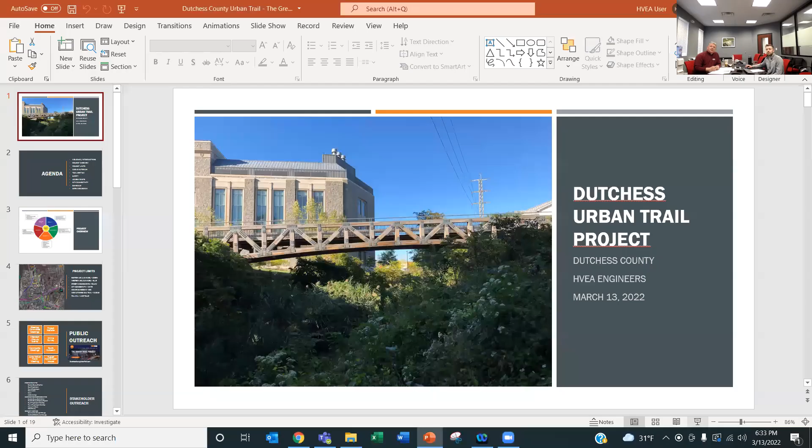I'm going to give you a very brief overview, and then Jack is going to give you more detail about the trail and its connections. But we're excited to present this project to you.

Happy Sunday, happy daylight savings time. My wife actually set all the clocks yesterday, so I made all of my time mistakes yesterday, not today, which is, I guess, beneficial.

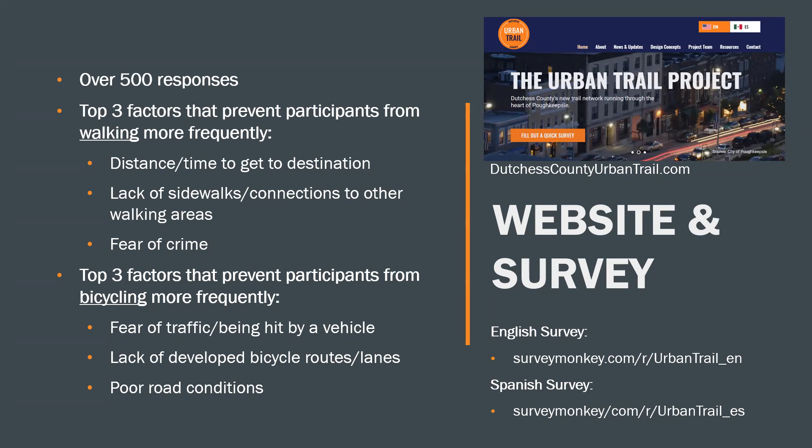Lastly, from our survey, I wanted to show that we had these initial concepts for the trail. I think one reason our firm was selected for this project is that we introduced the county to the concept of a split-use trail, with bicyclists and pedestrians on the same trail but separated — I think that's one thing that helped us get the project. After that, it was a very collaborative effort developing and refining our design to meet everyone's needs and fit within certain constraints.

We're at a real exciting time now. We're actually sending this out for bid, the first phase of this project, next week. It's a multi-phase project, and Jack will give you more information about that.

This is some of the stuff that came up in our survey about what people wanted for amenities on a trail. It's interesting to go through this list and see that everything on it, with the exception of probably trash cans — which has been problematic for the county and their trail system — is addressed.

So they look at it as a carry in and carry out. But other than that, all these other amenities are going to be a good part of this trail, so it really has great potential.

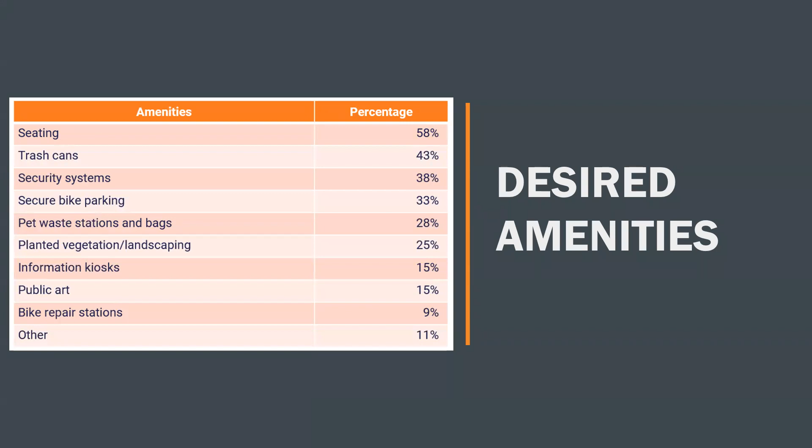All right, so with that, I'm going to hand it over to Jack, and he's going to go through the limits of the trail and some of these connections in a little bit more detail. Thanks, Brendan. As Brendan said, I just want to give you a general overview of the design and go into some of the specifics.

Given the unique character and location of this trail, we do anticipate heavy demand. In order to provide adequate space for all of the potential users, we're proposing several wide cross sections, all wider than the other trails in the area, with the exception of the walkway.

In the areas expected to have the most use, we're planning a 22-foot wide split use trail. In this section, we'll have distinct separated facilities for pedestrians and bicyclists, separated with a flush median. Pedestrians will have an 8-foot wide walkway, and bicyclists will have a 10-foot wide two-way contraflow bike trail. There'll be a 4-foot wide flush median with lighting, colored and textured, that will not only separate pedestrians and bicyclists but also provide extra usable width and crossover opportunities.

In areas where we don't have quite as much room, or expect demand to drop off somewhat, we're planning a 16-foot wide shared use trail. Here, bicyclists and pedestrians would share the trail, similar to most other trails in the Hudson Valley. However, we're debating splitting even this 16-foot width into an 8-foot pedestrian walkway and an 8-foot bicycle lane. I think that'll gain traction because a lot of the community members we spoke with like the idea of separated bicycle and pedestrian facilities.

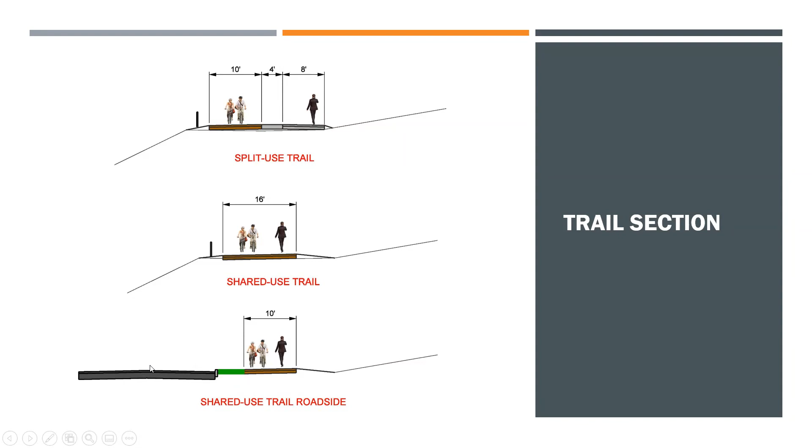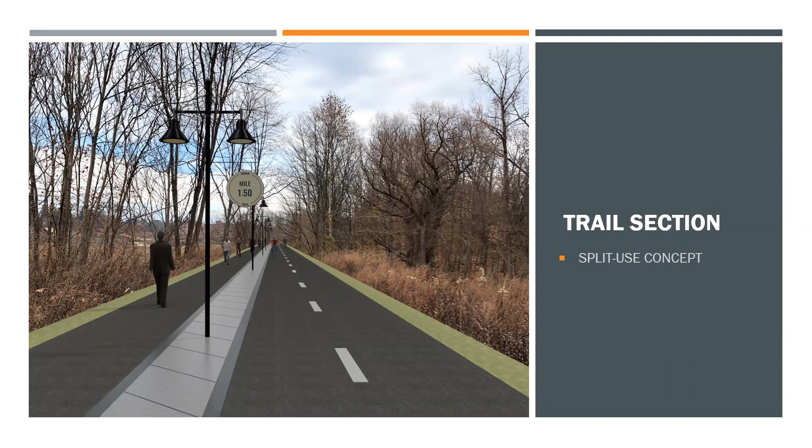This is a simple rendering of how the split use trail section is intended to look. You can notice the distinct facilities for pedestrians on the left and the bicycle path on the right. We're going to have lighting down the entire trail, as shown here, to keep it open 24/7.

This is a render of the 16-foot wide area where we don't have quite as much room. It looks very familiar to the other trails throughout the Hudson Valley, except the key distinction is the lighting flanking both sides of the trail. This section will be lit as well.

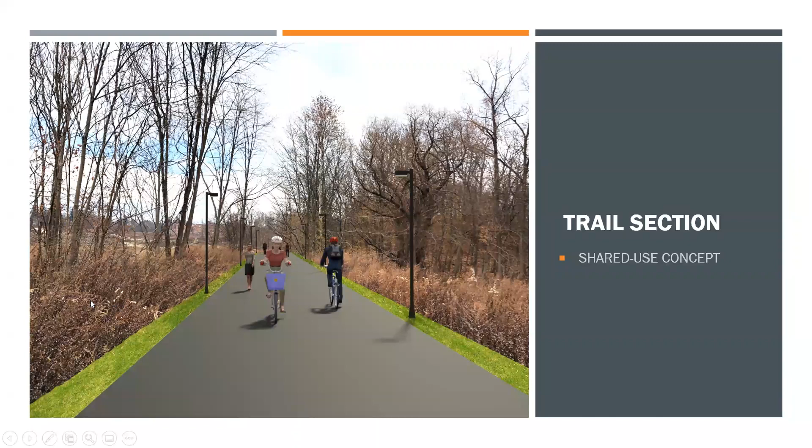One of the more common concerns we heard from the public revolves around trail safety. In order to create an inviting, comfortable environment, the trail will adhere to the recommendations in the Crime Prevention Through Environmental Design guidebook. Some key elements of this guidance are to maximize sight lines, reduce points of constriction, and have adequate lighting, especially since this trail will be open 24 hours a day.

The ultimate goal is to have enough activity and eyes on the trail that it becomes self-policing, but we realize it takes a little while to get there. So we've been working with emergency services to evaluate the use of cameras along the corridor or at strategic locations, and ensuring sufficient access points are installed for emergency services and people.

The trail will cross several city and town roads. We're evaluating each crossing for appropriate measures designed based on the characteristics of the roadway, the number of cars, the speed cars are traveling, and the sight distance at the crossing. There is one crossing we identified that warrants more than just a simple crosswalk based on those factors, and that's the eastern crossing of Fulton Street.

Fulton Street carries over 10,000 cars per day, has steep downhill grades, vehicles traveling at high speeds, and we have some poor sight lines. So in order to maximize the safety of this crossing, we're going to ramp the trail up and install a bridge to carry the trail over Fulton Street. It's shown in this little rendering and graphic in the bottom.

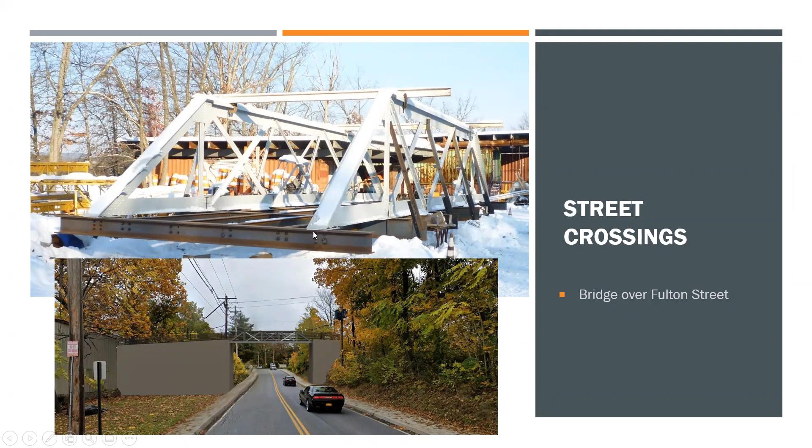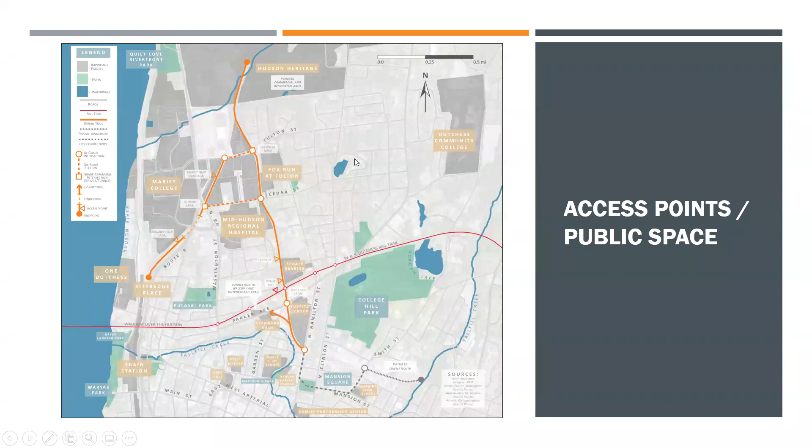So in order for this trail to serve as a link to all the amenities in the area, we're going to provide access at as many locations as we can. There will be ADA compliant access at each street crossing, including North Hamilton Street, Parker Avenue, West Cedar Street, Fulton Street, Kittredge Place, and North Road—those are on the west leg. In addition, direct connections will be established to the walkway over the Hudson, Dutchess Rail Trail, Taylor Avenue, Clark Street, Marist Campus, the McCann Arena, the new ShopRite, and other retail at Hudson Heritage. We're also exploring the corridor for opportunities for parks or public space, and we hope to continue to build on the foundation that this trail will set.

It's one of the more exciting portions of the trail—the interface with the walkway over the Hudson, the Dutchess Rail Trail, and Parker Avenue. There's a lot going on in this northern portion of the city, and we have a real opportunity to make a difference here and construct not just a trail, but other opportunities for public space.

At the southern terminus at North Hamilton, there's a portion of the trail that abuts the Fallkill. We're looking to open that up, create green space and/or a pocket park, and really give the residents of the city an opportunity to get right up against the Fallkill in a nice environment.

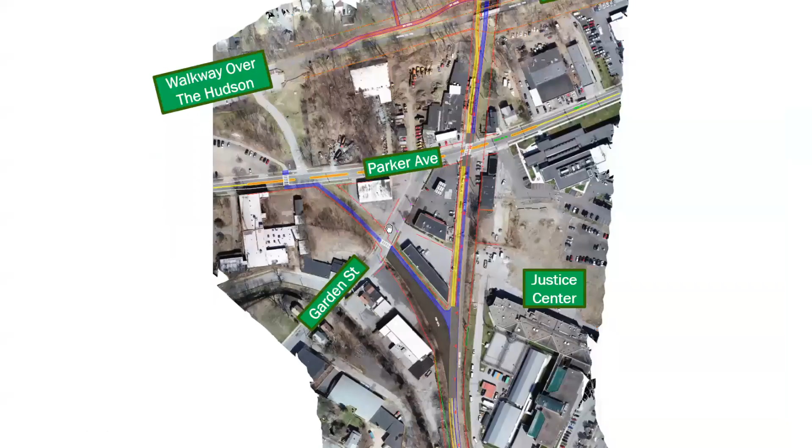As you move a little further north, the rail bed actually splits off, and there's a little spur that goes out towards the walkway over the Hudson parking lot. The county is going to be working with Scenic Hudson to reimagine this space for public use. There could be areas for farm markets or different gardens, community gardens. So this area is something we're going to continue to study with Scenic Hudson to make it the best we can. This is the location where Scenic Hudson is rehabbing these old industrial buildings—I think it's going to house their headquarters, and they're working diligently on getting that moved along.

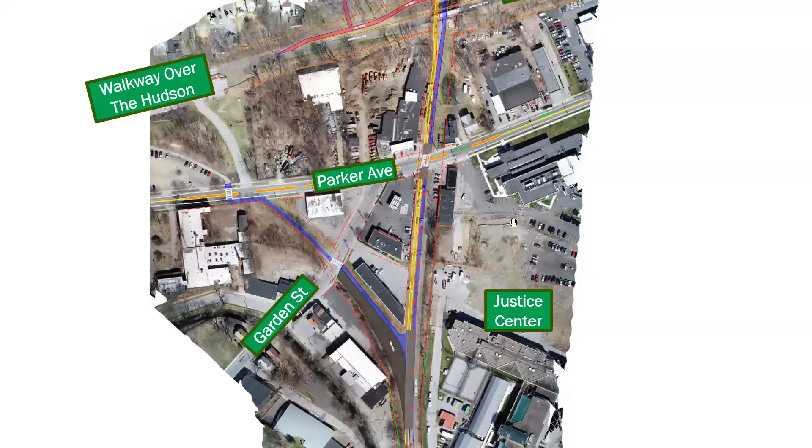So hopefully our trail completion at some point—this is actually one of the latter stages of our project, because the new Justice Center being constructed is utilizing the old trail bed for parking and construction staging. So we won't be able to get in there to build this little segment of trail until they're done with the Justice Center, which is another year or close to two years in length.

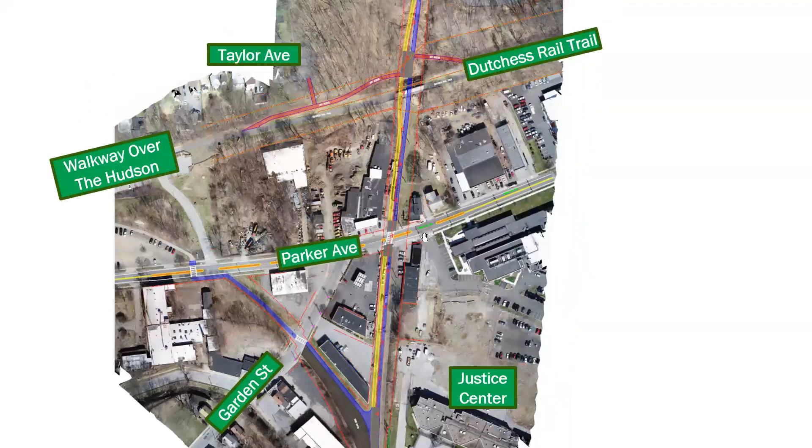So passing just north of Parker Avenue, the urban trail is going to go right underneath the bridge that essentially separates the Dutchess Rail Trail from the walkway over the Hudson. It's right at the beginning of the Dutchess Rail Trail. In this area, we are installing direct ADA compliant access ramps, both to the west to the walkway over the Hudson and to the east to the Dutchess Rail Trail. This is a prime connection for us.

We're going to have wayfinding, and it's going to be a real direct link for the residents of the city of Poughkeepsie to get onto the walkway over the Hudson, and for walkway users to be able to directly access this trail and head to the retail in the northern section, or Marist, or even get down to the waterfront by Quiet Cove Park.

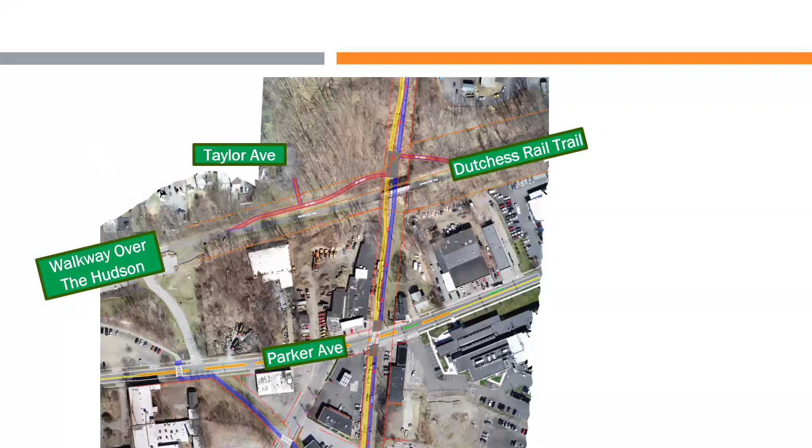One other thing to add: on Parker Avenue, the speeds aren't so fast here. There's actually less traffic on Parker Avenue than on Fulton, but we're still going to work to create more of a boulevard setting. We're going to put in some flush medians to help give refuge for people crossing the road and help slow traffic down.

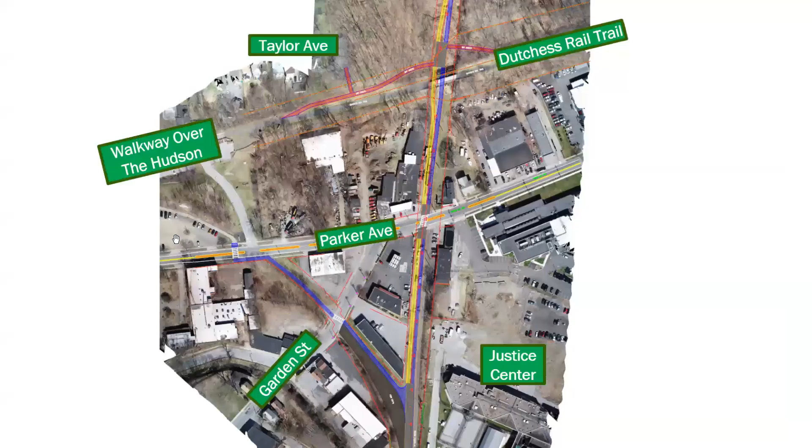There's going to be a couple of at-grade crossings here of the urban trail, and also in front of the new Scenic Hudson facility that's going to connect right to where the walkway is. There'll be some at-grade crossings there too. Although those come in a later stage, we're going to continue to develop that.

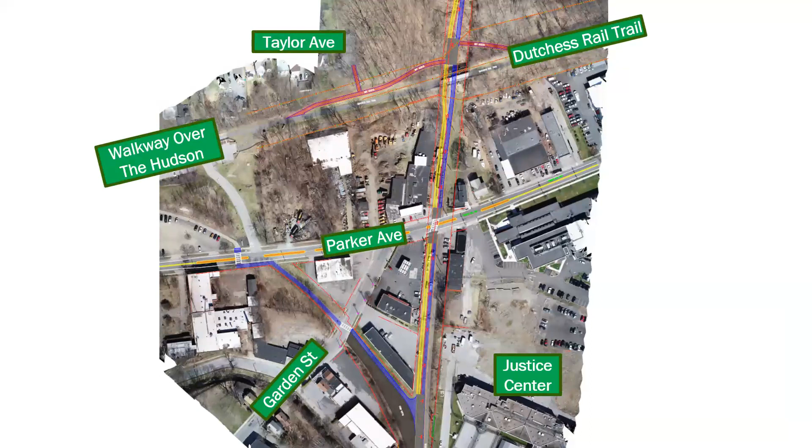Brennan hit on this earlier, but we are also looking to enhance the connections throughout the northern portion of the city. While the trail proper will end at Hamilton Street, we're looking for other ways to connect the north side to the trail. This could include wayfinding, ADA enhancements, or other improvements to Mansion Square Park or other assets in the city. We fully expect this trail to open the door for future funding opportunities to build on the foundation that will be set.

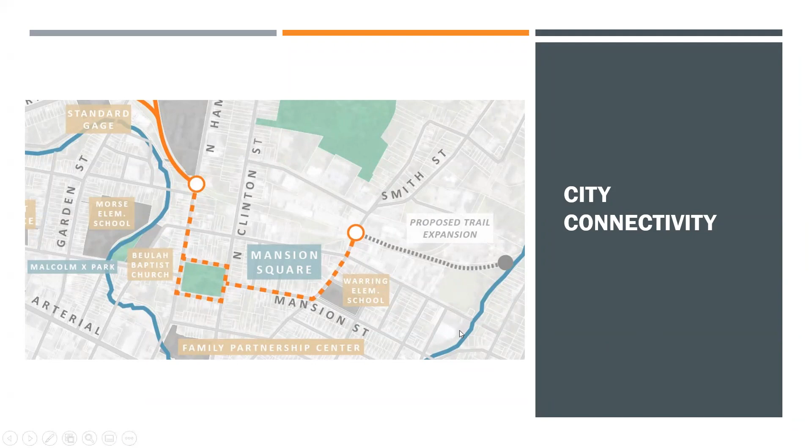So we envision this all happening in building blocks and multiple phases. Our project will be phased and built in segments. Phase 1 is currently scheduled as the eastern leg from Parker Avenue north to Hudson Heritage, along with the Fulton Street roadside connection. That portion is going to start construction this year.

As Brendan mentioned, the plans are going out for bid this week. There's usually a 4-week bid period, so we won't know who the contractor is for another month or so. But the goal is to get that portion underway and in construction by late spring, early summer this year, and have a portion open by the end of the fall.

Just to let you know how committed the county is to that, we did send out a small pre-contract to get some of the trees cleared, since there are restrictions with the bats on timeframes for clearing trees. That's actually taking place right now. If you're in that area, you'll see some activity of a contractor taking down some of the trees we need to construct this trail.

The future phases, which include the west leg through Marist campus, the remaining portion of the east leg from Hamilton Street to Parker Avenue, and the West Cedar Street roadside connections, are going to be constructed in 2023 and 2024. The reason for 2024 is that the Justice Center is utilizing the rail bed from Hamilton to Parker, so we can't construct the trail there until that project is done. But we should have a leg under construction every year for the next three years until this is complete.

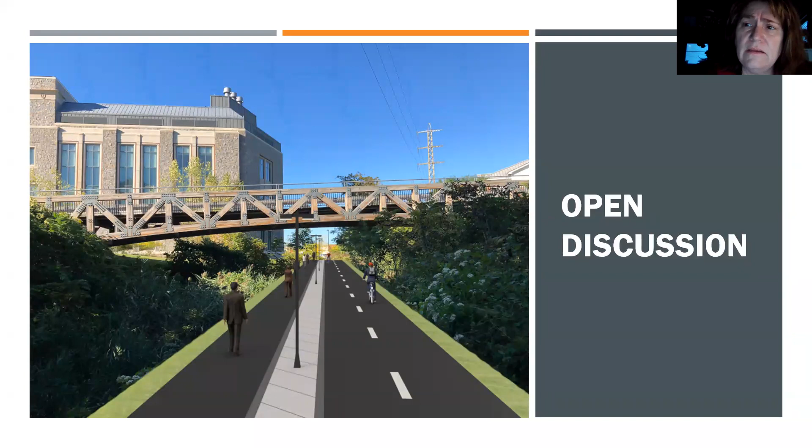Is there a way—you had a survey going on the website. Is that survey still alive, that they can go in and take the survey, or is that something you did in the past? I don't think the survey is still open, but the website is still open.

You're mentioning the tape of this presentation—our public meetings and other meetings that were broadcast are on there, right? Yeah. So if anyone from this group wanted to look at that or share it with anybody, there are other presentations we've done along with the county and other county officials that you'll find on that website.

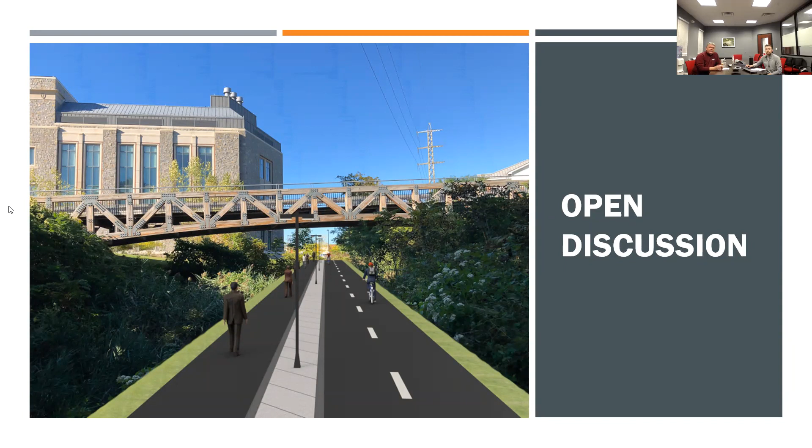Could you give that website, please? Yeah, it's DutchessUrbanTrail.com—or is it .com or .org? .com. We can probably call it up, right? Yeah, so Dutchess Urban Trail, all one word, .com. Dutchess County—oh, I'm sorry, Dutchess County Urban Trail. I should know this.

That's okay. So any other questions?

Well, thank you for this great presentation. I've gotten a lot out of it, and I'm sure we'll have a lot more once we get off the presentation. But again, we would love to have you back again as it progresses. Maybe that could be another presentation to show later in the year on where you're standing with your plans and everything, because I know they do change. So we would love to have you back again if that's possible.

Sure, yep. And even if you went on the website, there's some contact information for Jack or the gentleman from the county managing the project. I'm sure we're going to learn a few lessons from even constructing the first phase, so we might see some refinement over time. If it stimulates any thought, question, or comment from anyone in this group, please feel free to share it.

You're just getting really great compliments now. Great stuff, very exciting on the map. At some point it would be nice to see an overlay of bus stops. Thank you for being so informative.